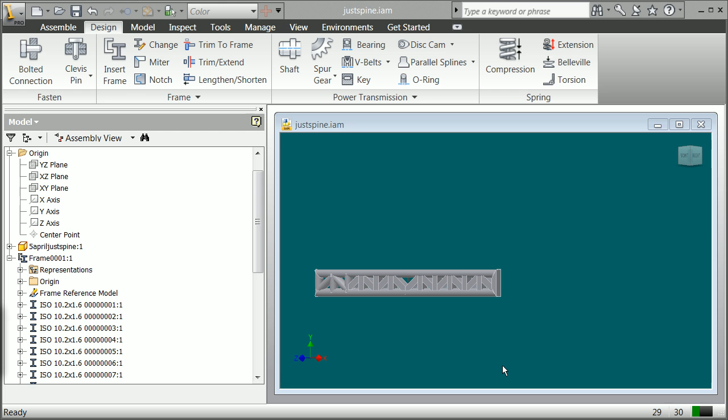Okay, I've gone through this. Remember, this is still a 12-inch piece, so we'll see. I'm going to keep going on this, and then we'll kind of do it maybe tomorrow or the next day, again realizing that you can kind of take your bridges there.

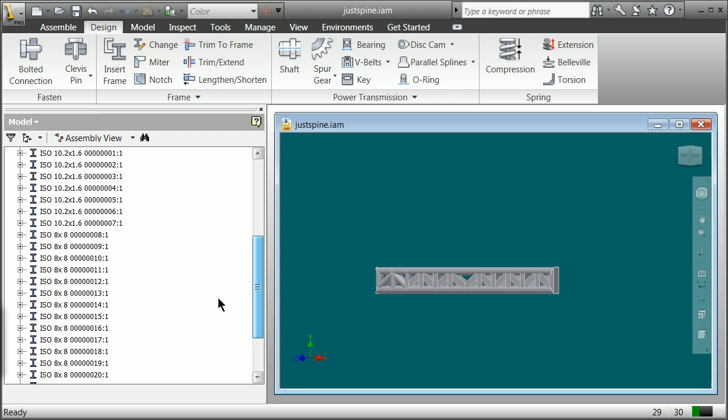I just picked out some basically sized, pretty large pieces of metal, the standard stock, and it made about a bazillion parts. So these are different sizes. You can actually go into each individual part here if you want. Double click on that, and it kind of lets you go in eventually, and actually you can go inside of that.

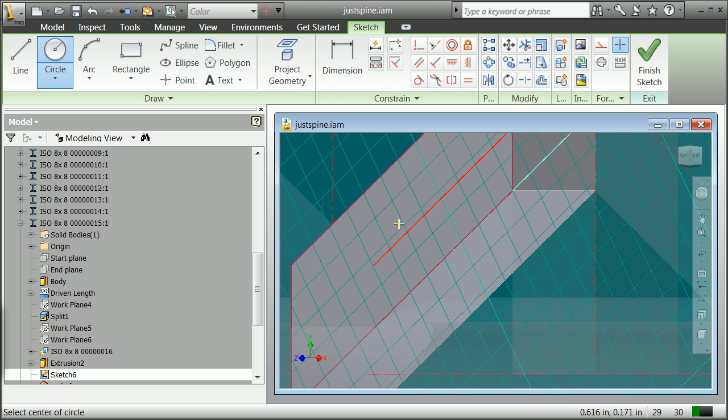All of a sudden do things like, I don't know, you want to put a hole in one. Well, you can create a 2D sketch in there. Right away it does that, and we're going to grab a circle, put a hole, just a little tiny hole in that one, in the one member there. We're going to finish the sketch.

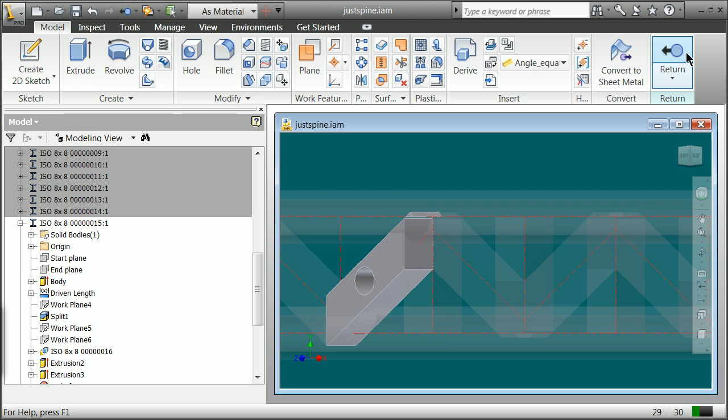You can still go through and do your extrudes. Remember, you can select out. Going to grab the profile, hopefully grab your profile here. You see it grabs that. We're going to do a cut and then hit OK. And what you've now done is you just cut a hole in that one.

So what this is doing and what it does to Frame Generator, it's just saving you some of the hassle as you go through. And so we're not going to cut any more parts out of this.

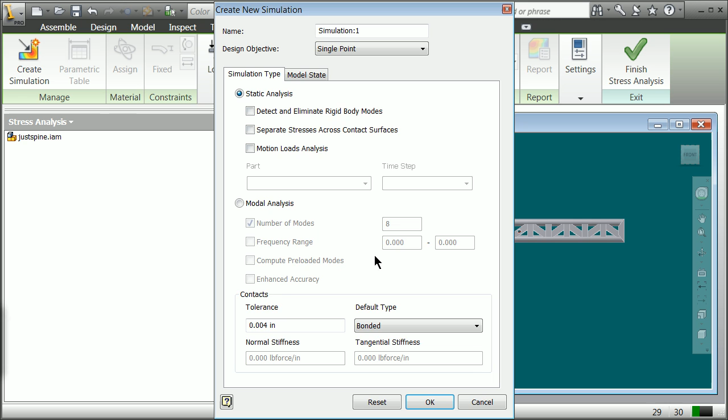What we're going to do right away now is go ahead into the environments and go to stress analysis and make this all aluminum. Trying to find the wood. Let's see if we can make it. I don't know the wood numbers yet, so I'm going to go to just create simulation here. Static. We're not going to go much more than that.

These are going to be all bonded together. You're going to see there's so many parts. It gets kind of interesting what it does with the contacts, loads, and constraints.

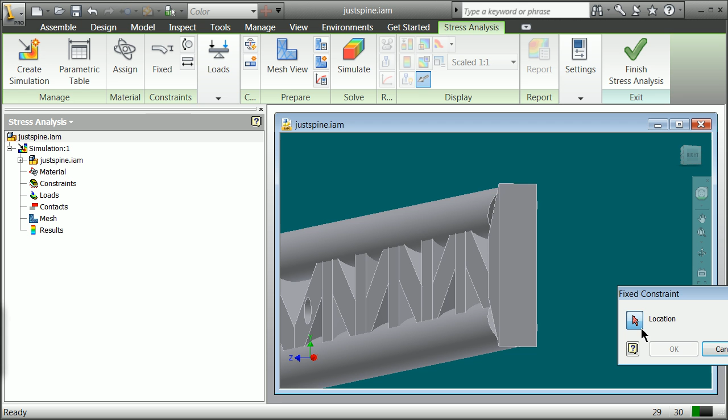But I'm going to turn around here and just literally add a constraint along something logical or not. We're going to add a fixed constraint along this face. So we're going to take a fixed constraint, grab the location there, click on that, and hit OK.

Now within that you've got a lot of different parts right now. We're going to also then add a cantilever load out on the outside. When we add a load here, again, we didn't turn these things in the right direction, so it's turned on its side.

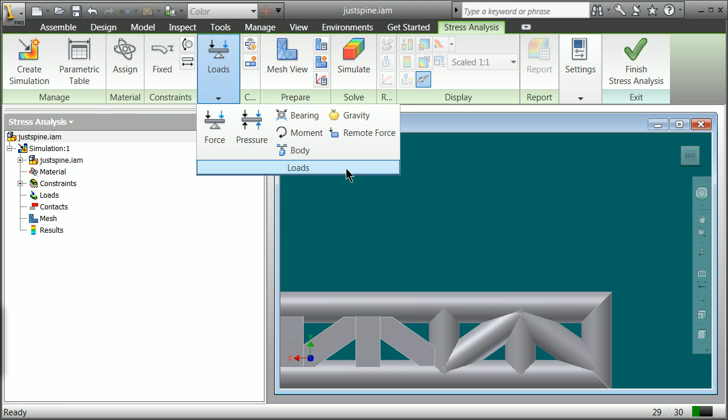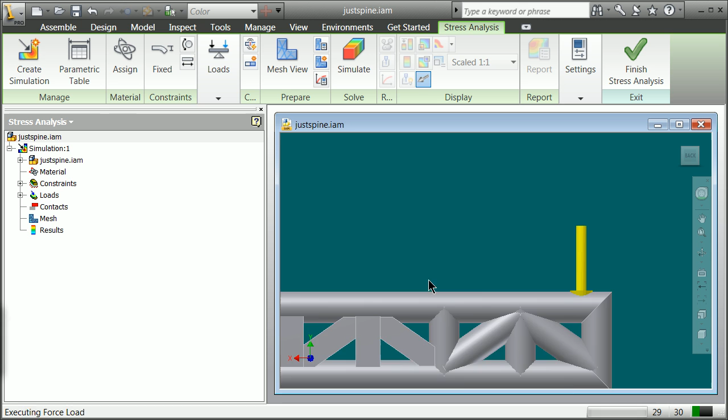So if we go here and we add a load, a force load, we're going to grab some spot right there and give it, of course, usually the vector components, and we're going to go Y of minus 100 pounds, and we'll see that LB force. That's what I'm talking about. So there we go. We hit OK, and it's kind of added that force someplace inside there.

We, of course, have to go to Material, right-click, Assign Materials. You're going to have a lot of stuff here. I think the default is something we'd like to just be able to take everything in there. We're going to go in and maybe go ahead and make it PVC piping. What I'd like to be able to do is to go through and have the default set. I'm going to go with this PVC piping.

And what we would like to do, you're going to see, is to be able to get balsa wood in here, which I've got. I don't know if it remembers it from yesterday. I'm not sure how that's going to work on campus. It's basically something, especially when you're mixing materials, is when it gets interesting. When you talk about reinforced concrete or a combined structure where you've got some tensile things, just look at how many parts it has made.

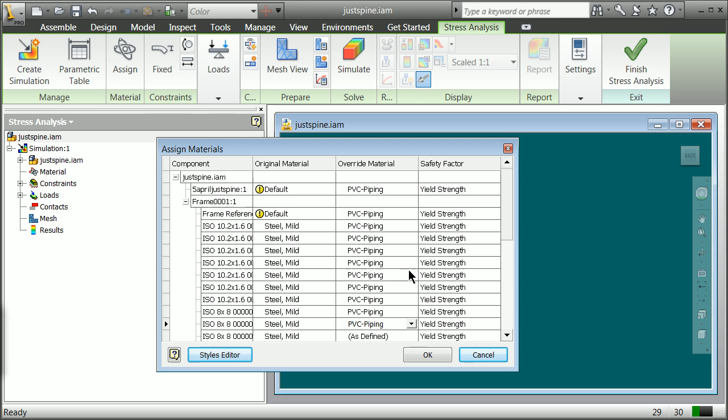And so learning quickly, and I'm not going to tell you I have the answer here to change what the default is so you don't have to do these each individually. I'm going to pause as I do the rest of these.

All right, I've made them all PVC piping. See, it's processing them all right now. A couple of things we've added: a constraint on one end. We'll see whether this explodes on me. That's a lot of spinning of my hourglass there. So we'll see whether this, okay.

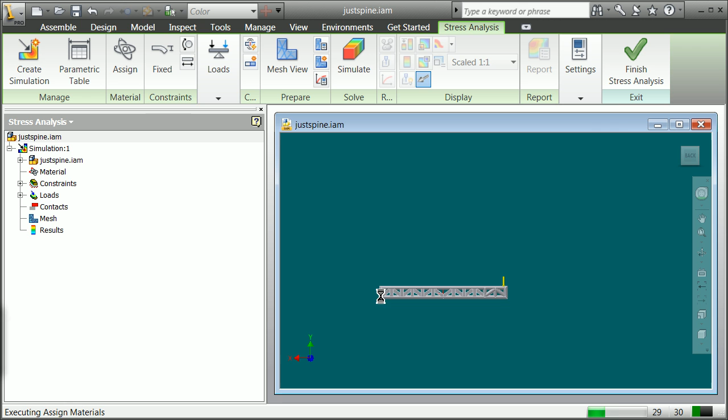We added a constraint, we added material, we've added loads. We would really like at some point here to do automatic contacts. I think it's what it's going to do. It's going to do bonded contacts where everything is there. So it's computing a lot of geometric stuff.

You're going to see when I turn on the mesh results, it should tighten up the mesh around my hole. And this thing, if it's PVC pipe, we'll see how it's gone through the mesh. We're going to go ahead and right-click and view the mesh. There's my mesh view. It's going to probably take a while to show you the mesh. It should put some extra triangles around that hole there.

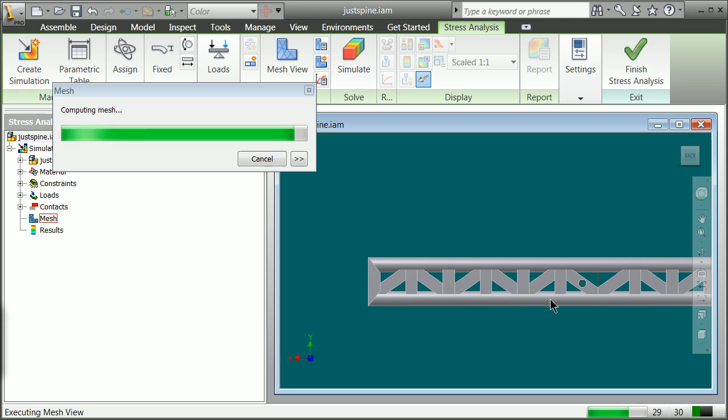And I realize I skipped one of my general supports there as we kind of went through and mimicked a little bit of that box truss that you saw busted today that Greg worked so hard on this weekend. I'm going to pause this as it's computing the mesh even as we speak, to see how it works on campus and how this stuff then eventually goes into Revit as well. Remembering the biggest mistake I think that I made here and it's not showing. There's the mesh.

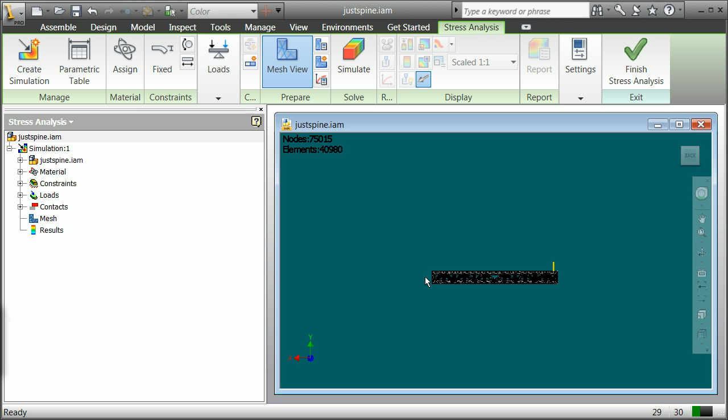And you see what it starts to do around these holes. Sometimes you can densify up the mesh, so it's made some assumptions, done a little bit tighter, and basically done a mesh. Now we're going to see it do a whole lot of calculation here with a mesh that's dense. We're going to hit simulate.

And we're going to run it. We'll see what it does. Again, this was PVC piping, so I'm going to fill this time with this.

Somehow in the last week, between Congress and the President, they have decided they're going to allow drilling. You saw the price of natural gas go up 5% today based on how we estimate gas. I remember back in college, 1978 through 82, Sargent & Lundy in Chicago would hire and fire 200 engineers and technicians almost at will to design pipe hangers for nuclear power plants. Those were great jobs.

Those and jobs like that are going to be part of this new business. So this sense of getting going, even as we go into Revit here, with what's possible in Inventor between not only the static but the dynamic is worthwhile. When Autodesk freed this up for students about 6 months or a year ago for free downloads, it did need to change the way we think about things.

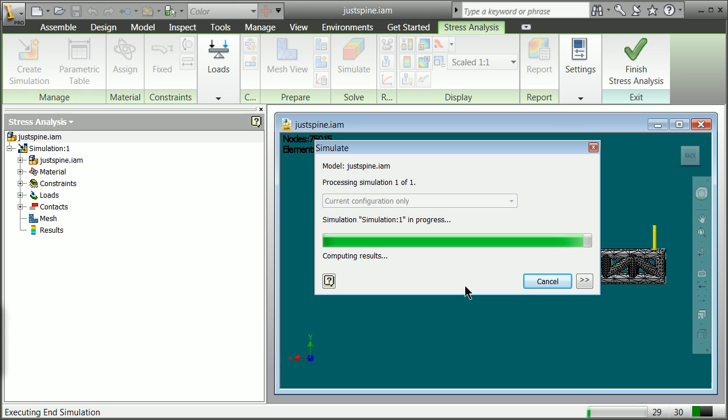And so you see this progressing as I fill the time. Oil and gas, Pensacola, they're going to drill off of Pensacola, off the East Coast, nuclear power's back, and there's going to be a whole lot more green power. There's a lot of modeling that's going to be done and construction and all kinds of different stuff.

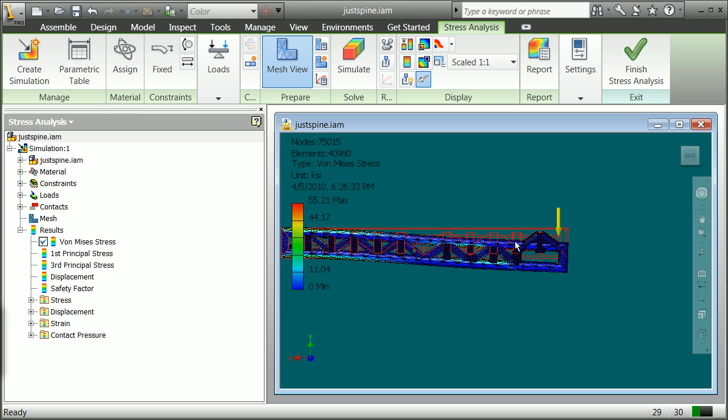We're going to see, hopefully, that this got done. I have no idea what it did in the end, but it did something. If we look at that, somehow the bonding or what happened here showed a lot of this kind of sense. It looks like, it's hard to say what it did. But that's this general bit where you then have to go back and truth it.

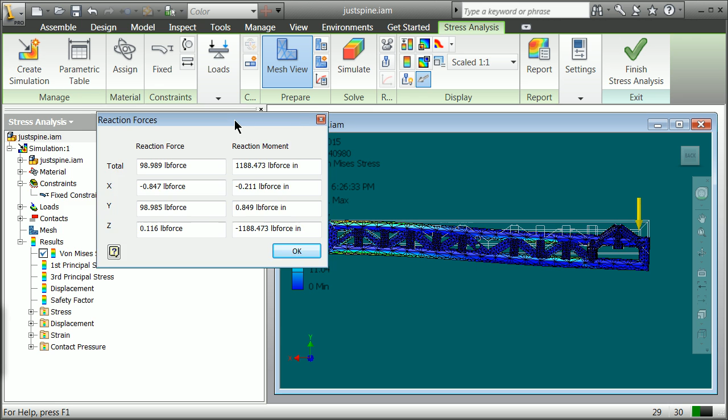So what I'm going to do, for one point here, is go back to the constraints. Right here, that fixed constraint, I'm going to go to the reaction forces. And in that you see, because this was a cantilever, you see one of your triangulation points. If you remember, this was 12 inches and 100 pounds, so you should have about 1,200 pound inches. And that's what you have.

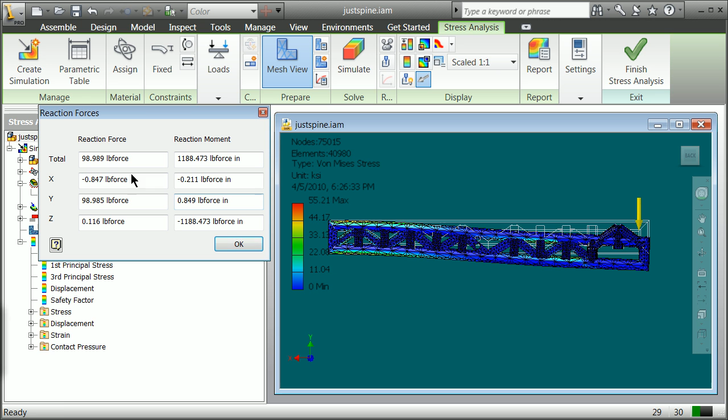You have a reactive moment of 1,200 pound inches. You have a reactive force of about 100 pounds compared to that. If you go in the X and Z, I don't know in the end where my forces went straight up and down and where I placed it. But basically, you want to start doing these things and truthing a little bit that in fact it gave you something you expected.

So right here, you can see, let's think about the positive and negative moments. Let's see if we can turn this over there. If you think about it, this was turning about the z-axis, and it was spinning in a negative way, so the reactive moment had to be positive to resist this negative moment.

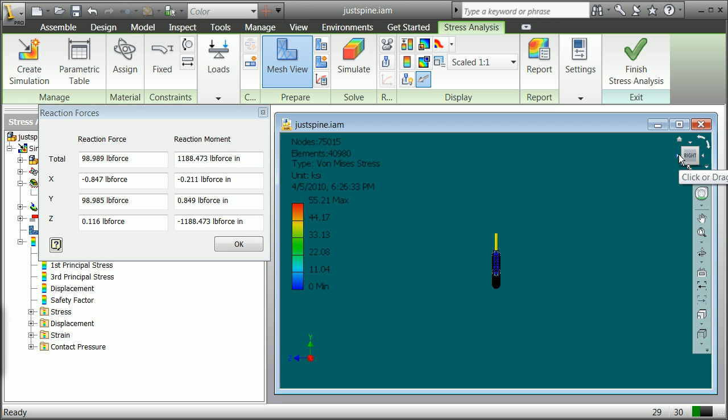If you look about y and x and z, we'll see if we can turn this thing around a little bit. There you go. If you look at that, we're going to turn z back up to us, and turn this up the other way. And I'm going to turn it back down.

So you start to get this sense that, all right, that was actually causing a positive moment. So the reaction moment actually should be negative depending on how these things are laid out. I want to point out that based on X, Y, and Z coming out of the board, this spin is a positive spin, so the reactive moment should be negative. So they are using a different set of forces.

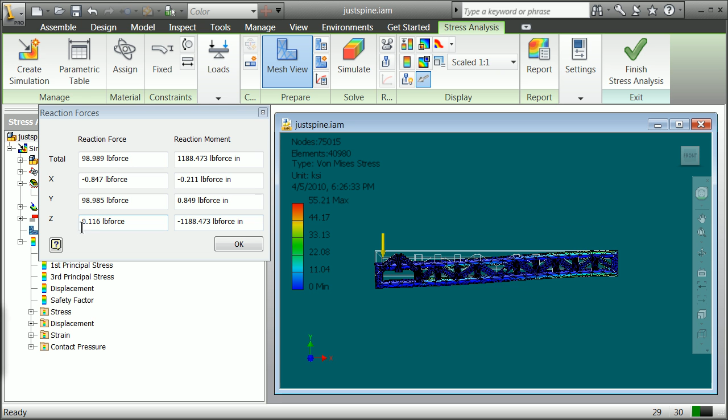Now we're going to look here at what these reaction forces are, and it's kind of hard to make these out, but we see the 1200 there. So you do want to do this with cantilevers a fair bit, because cantilevers are pretty interesting, since as you draft them up you can kind of get a hold of it because it's all in one spot. In other words, this has a reactive moment, a reactive force, and the X, Y, and Z, a three-dimensional problem. I'm kind of curious what it does for all these reactions, but that's what it gave you in terms of the constraints.

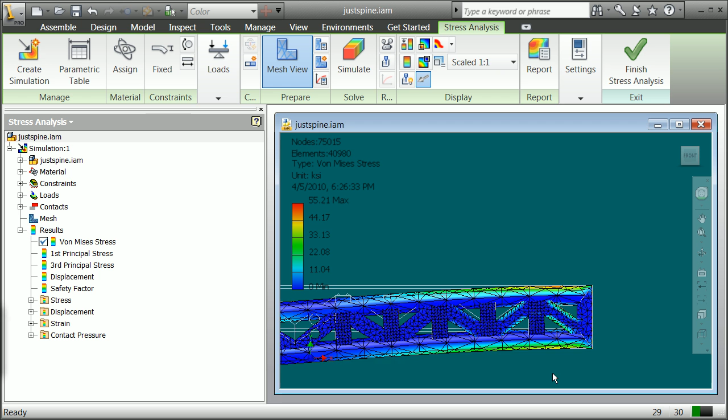Contact pressure, we really don't have much of a contact pressure because we don't have contacts except for these hard ones. So we're going to end up with that.

So I want you to realize how powerful Frame Generator is, how powerful just drafting basic lines can be. Even if we have that other stuff around, that is worthwhile, but getting your center lines thought out so you can use some of these programs, particularly when you get into Revit.